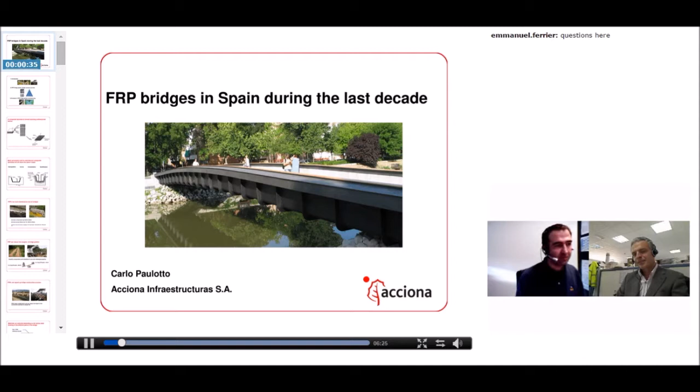Good afternoon, everybody. My name is Carlo Paulotto, as was told by Emmanuel, and I'm a civil engineer. In the last decade, my main interest was the application of FRP to civil engineering. This presentation will be focused on the experience gained by Acciona, a Spanish contractor, on the application of FRP to bridges in the last decade.

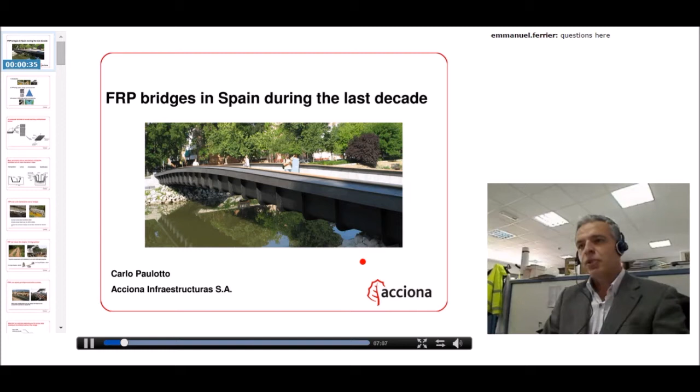My presentation is divided into three main blocks. The first block is an introduction devoted to explaining why we think FRP materials are good for bridge construction. The second block is devoted to presenting the design method we follow to design our FRP girder bridges. The third block is devoted to presenting the evolution of our manufacturing process. Finally, there are some slides devoted to the main conclusions that can be drawn from our experience.

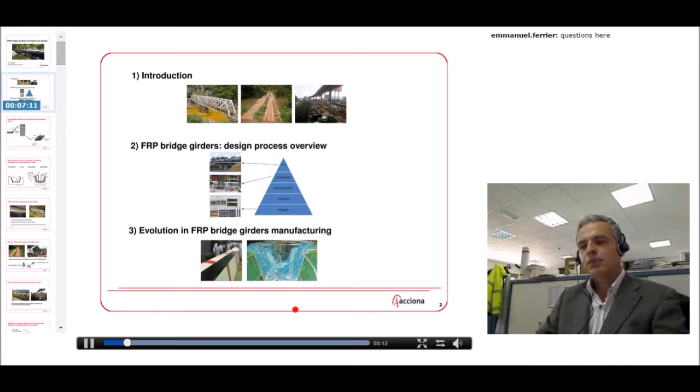Before moving to the first block, let me spend a couple of slides just to be sure that everybody is on the same page.

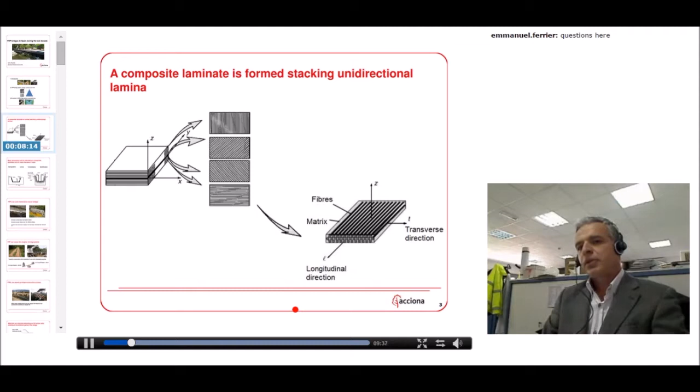If you imagine cutting out a piece of the wall of our FRP girder and looking at this little piece through a lens, what we realize is that the wall is formed by a set of laminae stacked one on top of the other. If you look at this element closer, you will realize that each lamina is formed by a series of aligned fibers embedded in a matrix, generally a polymeric matrix. You can realize that the mechanical behavior of this lamina is very different in the direction of the fiber than in the transversal direction. That is, the lamina is mechanically highly orthotropic.

There are many ways to manufacture FRP laminates, but all the processes share the same four steps. Impregnation, meaning the dry fabric is wetted by the resin. The layup step, in which the laminae are put one on top of the other with a predetermined orientation. The consolidation step, in which air trapped in the laminate is squeezed out. And the solidification step, in which the polymeric matrix gets solid.

Here I have put two examples of manufacturing processes. On the left you have a wet layup process. It's very simple: you put a layer of resin on a mold, generally a steel mold, then you put dry fabric on top of the resin, and with a roller you push the dry fabric against the resin layer to soften it. In this way you get the dry fabric wet and at the same time consolidate the laminate, then you can supply heat to cure the resin, and in this way the resin gets solid.

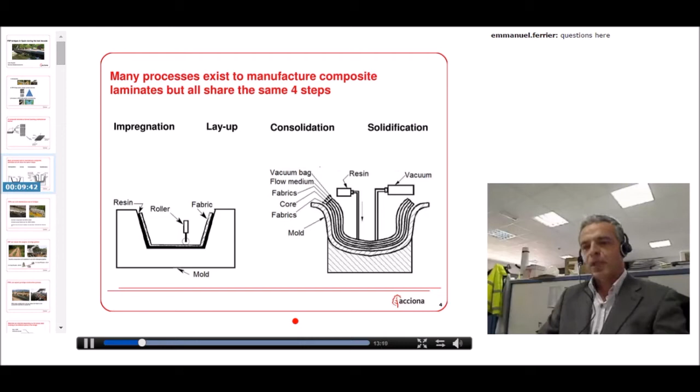After this short introduction, let's move to the first block of my presentation. It is devoted, as I mentioned, to why we think FRP materials are good for bridge construction.

The first reason we think FRP is good for bridge construction is that FRPs can curb maintenance costs of bridges. The maintenance cost of bridge stocks is very high. According to the Federal Highway Administration, the corrosion cost of highway bridges alone is around $8.3 billion a year, and indirect costs are 10 times this sum. So you realize this is a huge amount of money.

The main reason of this cost is steel corrosion. Since FRP do not suffer from galvanic corrosion, they offer a good chance to curb maintenance costs of bridge stocks. This is appealing not only for governments that presently are fighting to keep their budget under control,

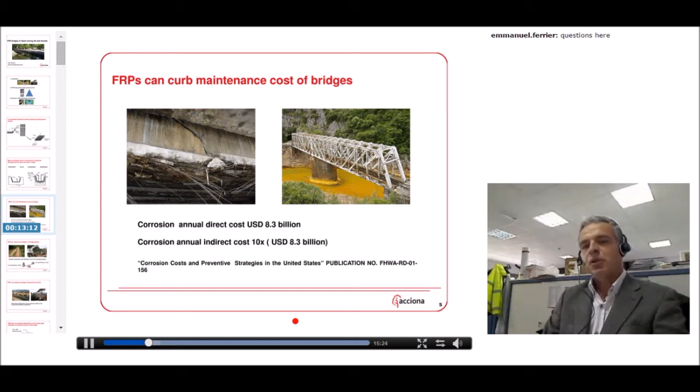but also for contractors, because nowadays large infrastructure contracts are often bid as design, construction and exploitation projects. This means that you not only design and construct the infrastructure, but you also have to exploit it - you have to maintain the structure for 20, 30 years before giving the infrastructure back to the government. So even for a private company nowadays, it's very interesting to be able to curb maintenance costs of infrastructure.

The second reason we think FRP are good for bridges is FRP can reduce the weight of bridge girders. Generally as a contractor, we don't always have our work site in urbanized areas. Sometimes our work sites are in areas with very challenging logistics, where communications are very difficult, and where you don't have very powerful tools. Here are two examples.

For example, the picture on the left is a bridge you encounter in central Gabon, where we operate. You can realize that you cannot cross this kind of bridge with very heavy materials. Often in this area, you don't have at your disposal a very powerful crane to install bridges, but often you use, for example, an excavator as a crane. So if we can have a very light structure, this simplifies transportation and installation in this area.

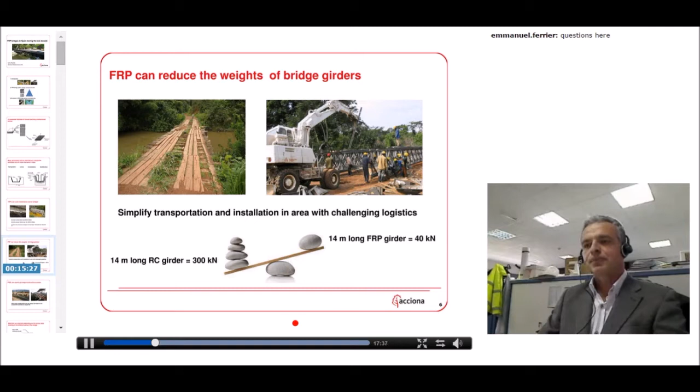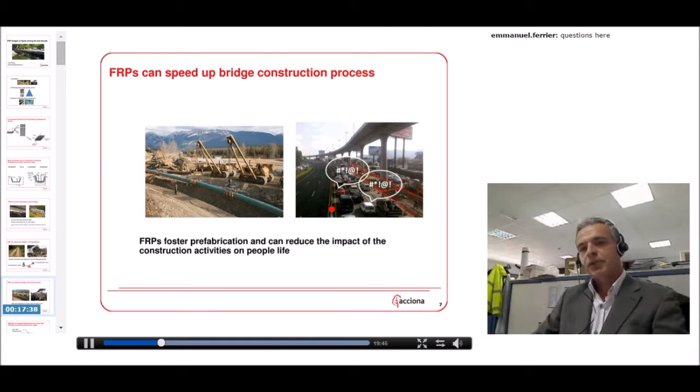Another thing you think when you're a student is that people will be grateful to you because you are building new infrastructure for them. But the sad reality is that people actually hate you because they see you as an obstacle between their house and their workplace. So if you're actually able to shorten the duration of the work site, you will really make them happy. Since FRP foster prefabrication, they are able to reduce the impact of construction activity on people's life. This is very important, especially for politicians.

Let's move to the second part of the presentation, devoted to presenting the way we normally design our FRP bridges. The first step is material selection. Generally, we select material depending on the stress state existing in the different parts of the bridge.

Here you can see a cross-section of one of our bridges. This is a cross-section at the abutment, because you see here the supports and the cross-section of the diaphragm at the supports. But you can see from this picture that in our case, the bottom flange laminate is mainly made of carbon fiber at 0 degrees, while the top flange laminate is mainly glass fiber at 0 degrees, and the web laminate is mainly manufactured using glass fiber at plus minus 45.

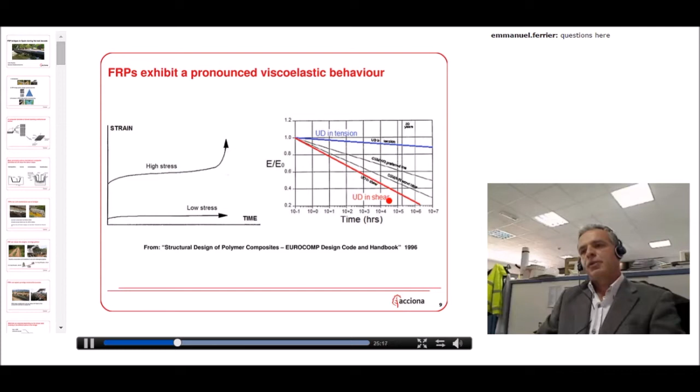Taking into account this difference in behavior between tension and shear, you can conservatively assume that the compression behavior follows the curve of shear behavior. This is why in this cross section we select reinforced concrete to resist compression forces.

We don't think it's a good idea to resist compression forces using laminates, so we prefer to resist compression forces using concrete, and use FRP to resist tensile stresses and shear stresses in this region.

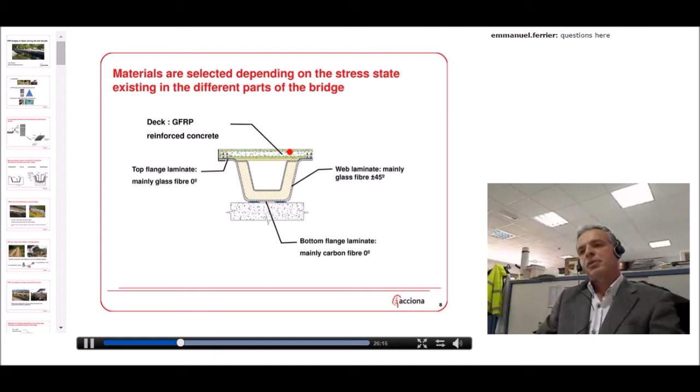Here you have a top flange of FRP that is mainly made of cheap glass fiber, and it will work only during the installation phase before casting the concrete deck on the bridge.

Once we have selected the manufacturing process and the basic material, that is resin and fiber, we go on with our design process, performing a reduced version of the pyramid test from the aerospace industry.

So what we do, once we have selected the matrix, the fiber, and the manufacturing process, is manufacture coupons, specimens, and test them. In this way, we characterize the mechanical behavior of the lamina.

Here you can see some samples that we tested for UD, I think it was a UD carbon fiber fabric. These are the specimens we tested in tension in the 0 direction, the specimen tested in tension in the 90 direction, this is the specimen tested in compression, this is the specimen tested in shear, and these are the specimens tested with the short beam tests.

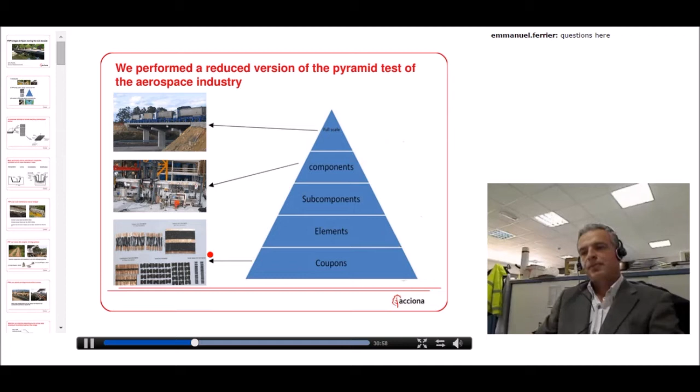As I told you, the following step, starting from the property of the lamina we evaluated experimentally, is to select a certain percentage and orientation of fiber. So we select the architecture of the laminates depending on the stress state that exists in different parts of the girder, and we evaluate the laminate property numerically.

We generally use a software called CADEC for this. It's a freeware that has been created and maintained by Professor Ever Barbero of West Virginia University.

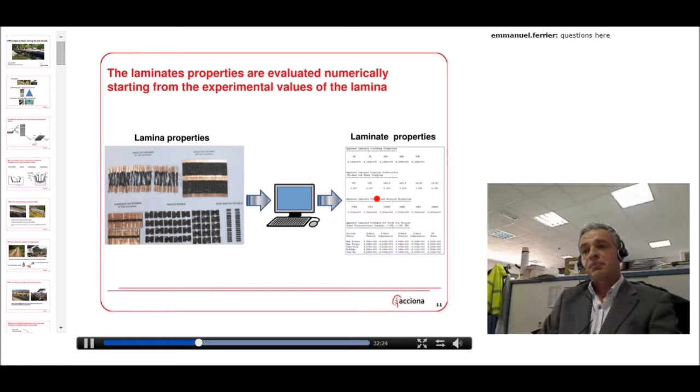With this laminate property, we perform the first check of the bridge by hand calculation using the Timoshenko beam theory. If everything is okay, we start simulating the bridge by implementing a finite element model. To do this, we generally use ANSYS software.

To simulate the laminate, we generally use layered elements like shell 99 and shell 93. These elements are layered, meaning they define the property of each lamina of the laminate. ANSYS automatically evaluates the stiffness matrix of the material, and you can apply failure criteria lamina by lamina automatically by asking the software to do this.

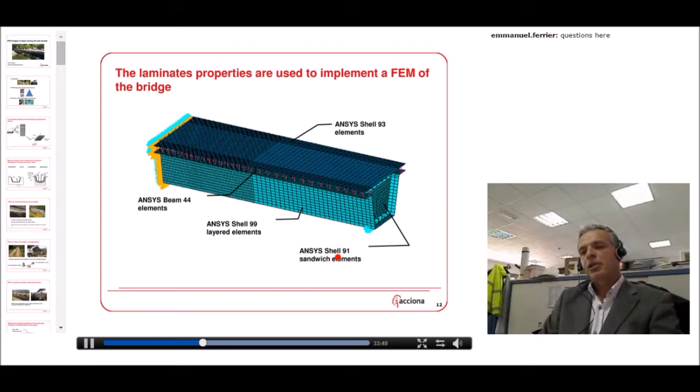To simulate a sandwich structure, we use the element shell 91, because for sandwich elements the classical lamination theory doesn't apply.

As I told you, each time we change the typology of the girder, we have performed a real scale test of the girder, and we have compared the experimental results with the finite element simulation results in order to assess if the finite element model is able to represent the actual behavior of the FRP girders.

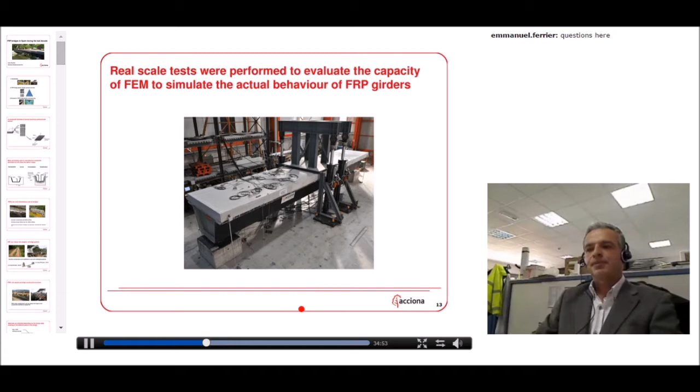This is a test of one of our girders performed at the European Laboratory for Structural Assessment in Ispra, Italy. In this case, the girder was submitted to 3 cycles up to the service load and 3 cycles up to the ultimate level load.

This is the displacement at midspan of the girder, measured by LVDT number 16, positioned at the center of the cross section at midspan. You can see that there is a good agreement between the numerical model and the actual behavior of the girder.

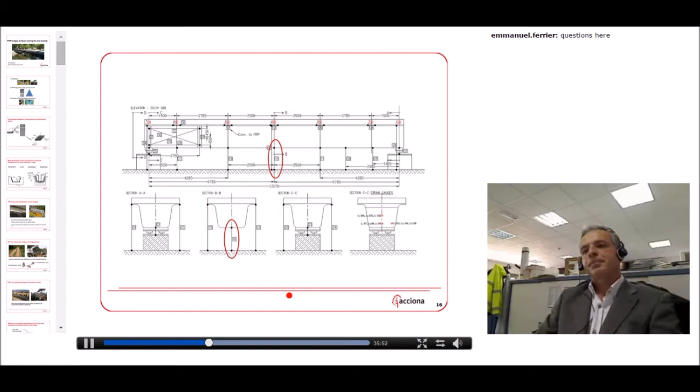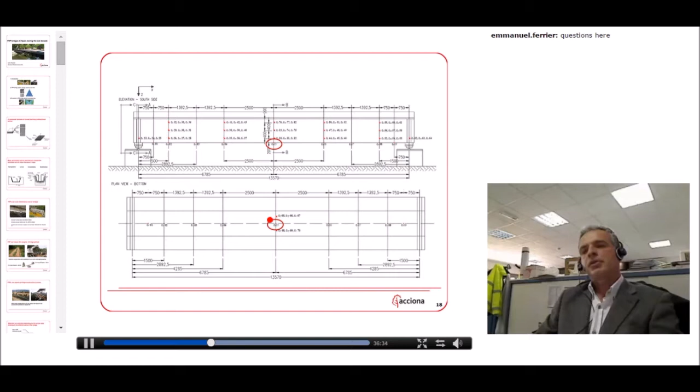We have checked that there is a good agreement in terms of displacement. Let's check if there is a good agreement in terms of longitudinal strain. So we applied a lot of strain gauges to the girder, including a rosette here, and we are looking at the strain gauges applied at the midspan, at the bottom of the girder, along its longitudinal axis. Once again, there is a good agreement between the numerical and experimental behavior of the girder.

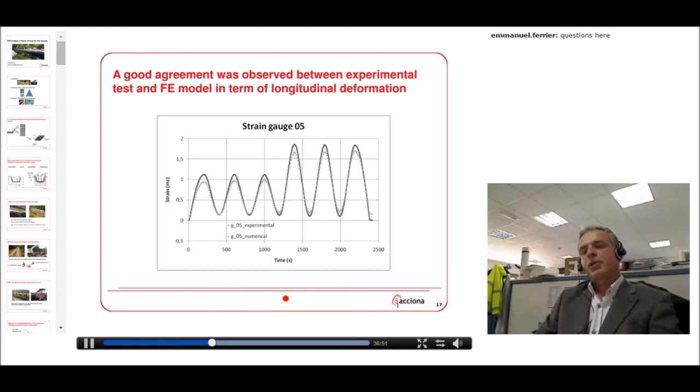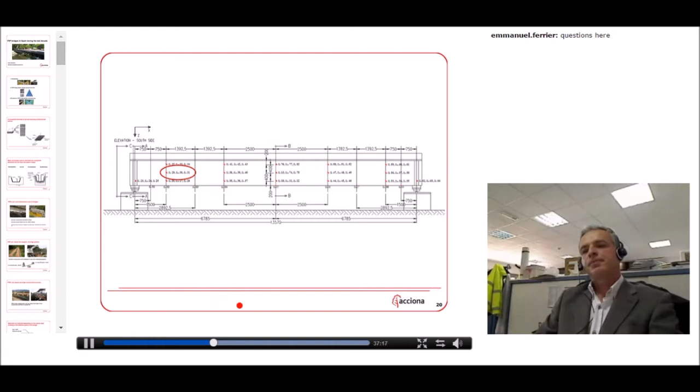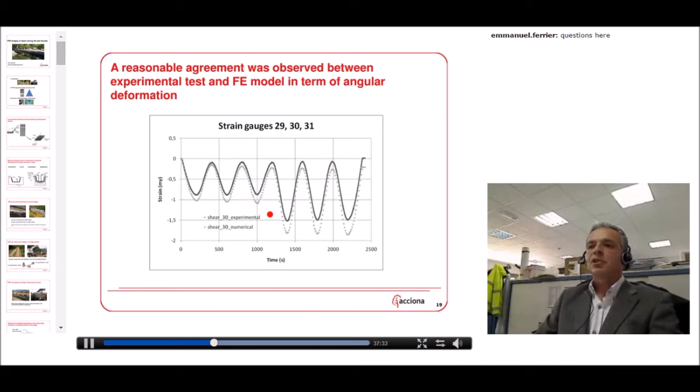After checking the strain in the longitudinal direction, we check if there is a good agreement in angular deformation. To do that, we check the rosette positioned here, close to one of the supports. And you see there is still a good agreement between the numerical and experimental behavior of the girder at the service limit state and at the ultimate limit state.

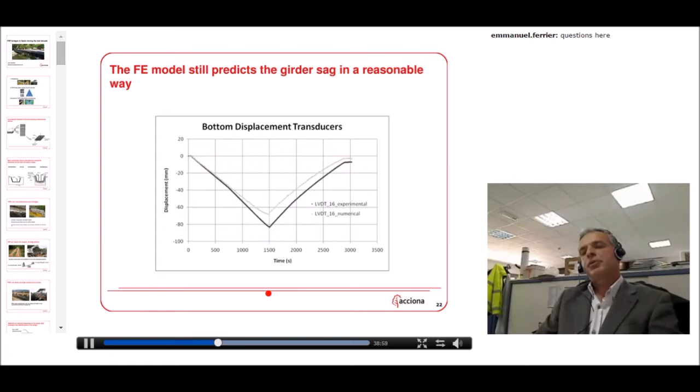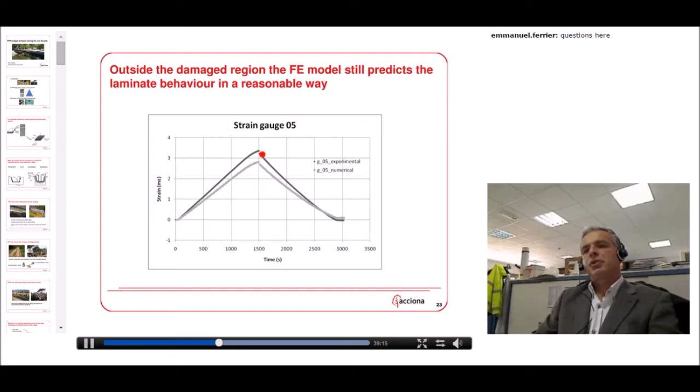There is still a reasonable good agreement, taking into account that at failure the girder is experiencing some inelastic behavior while the model is elastic. Even in this case, there is still good agreement between the physical and numerical results in terms of displacement. The strain gauge at midspan, at the bottom of the girder, also shows a good agreement between the numerical and experimental values.

But I need to say this is not a problem, because so far we design laminates for first ply failure. So actually we are not interested in capturing this very inelastic behavior of the girders. As I told you, the design is actually dominated by the service limit states, not by the ultimate limit states. You have enough reserve of resistance.

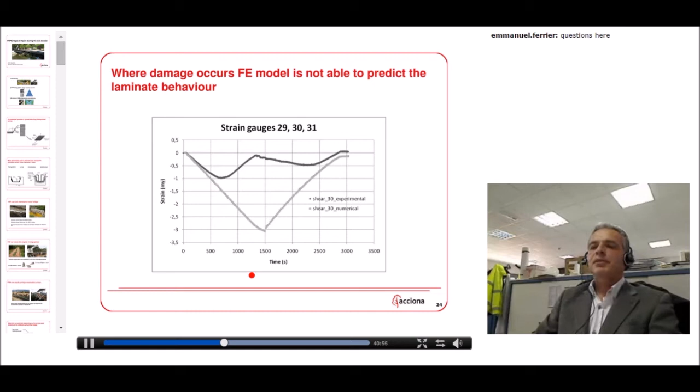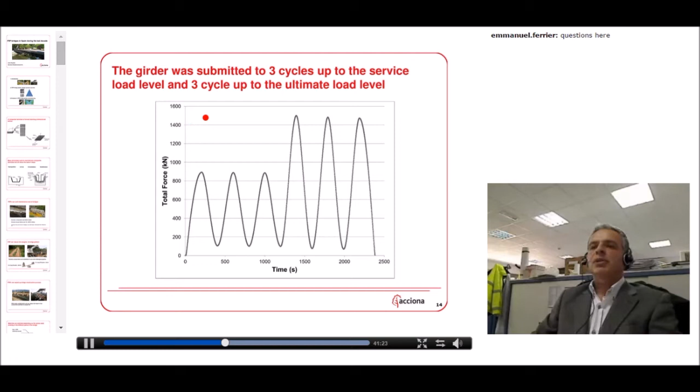If we go back here, you see that you actually have the failure of the laminate at a load level of 2,500 kilonewtons, while the load level at ultimate limit state that I showed you is around 1,500 kilonewtons. This is the ultimate limit state, and this is actually the load level where we observed the failure of the girder, so there is enough reserve strength.

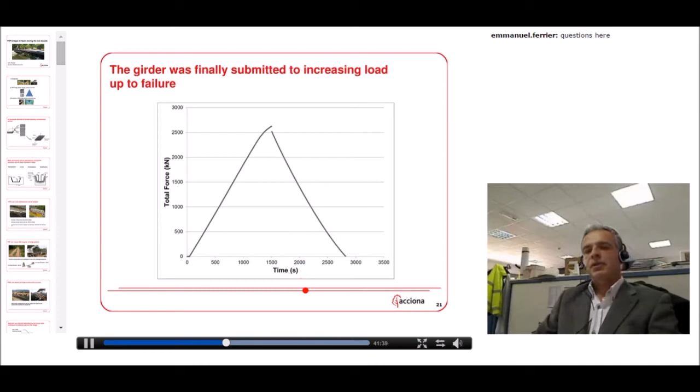Let's move to the third part of my presentation. In this part, I would like to illustrate how our manufacturing process has evolved over the last decade.

The first FRP girder bridge we built was in the north of Spain, in Asturias, in 2004. It was a continuous girder bridge on 3 intermediate supports, with spans of 10, 13, 13, and 10 meters, for a total length of 46 meters. We adopted a closed section girder with aerospace carbon fiber prepreg, and the laminates were consolidated by vacuum bagging.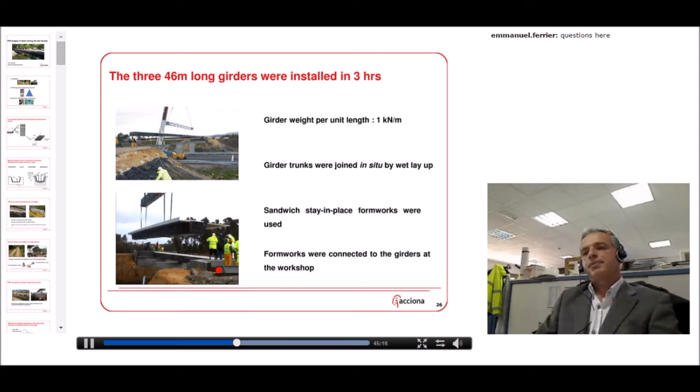Okay, the following bridge, actually there were 2 twin bridges we built in 2007 on the outskirts of Madrid. And we applied a set of modifications to our manufacturing process, taking into account the lessons learned during the first application.

As I told you, for the first application, we use a closed-section girder with trapezoidal cross-section. This is very good from a static point of view, but this obliges you to use a stay-in-place mold. The stay-in-place mold is represented here by this polyurethane mold. This means that for each of the girders, you lose the mold.

And this increases very much the costs of these girders. For this reason, when we start designing the second and the third bridge, we decided to go for an open section. And why an open section?

Because in this case, you can use a steel mold that can be reused for each of the girders. So you can use a couple of molds to manufacture all the girders. In this case, we use 2 molds to manufacture the 24 girders of these 2 bridges.

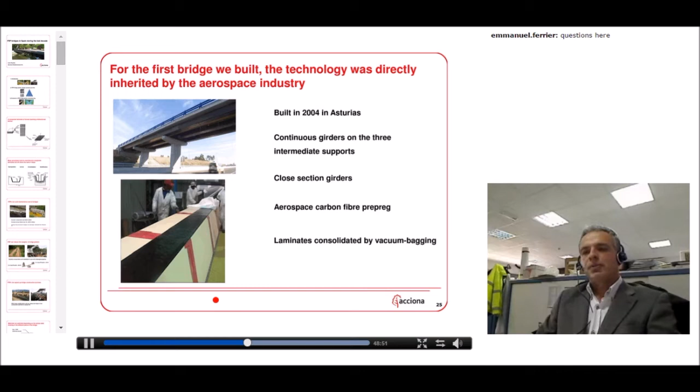So to try to reduce costs, what we did is produce our prepreg in-house. I mean, we took dry fabric, we bought a machine to impregnate the fabric, and we manufactured our own prepreg. You see here, people stacking prepreg fabric on the steel mold.

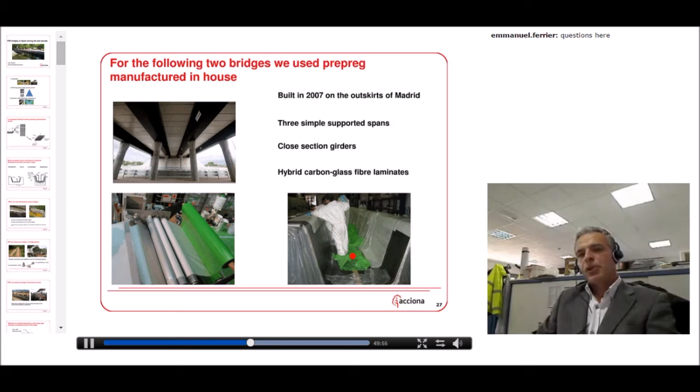Another modification: the previous bridge was completely made of carbon fiber. Carbon fiber is very expensive when compared to glass fiber. So for this new bridge, we decided to use carbon fiber on only specific parts of the bridge, not all the bridge in carbon fiber, because often it's not necessary. In this way, we were able to reduce very much the cost of the FRP girders.

Since we use glass and carbon and not a full carbon girder, you have to pay a little bit in terms of weight. You see, we pass from 1 kilonewton per meter to 3.5 kilonewton per meter. But even in this case, you can see that it was possible to install the girder using a simple truck crane.

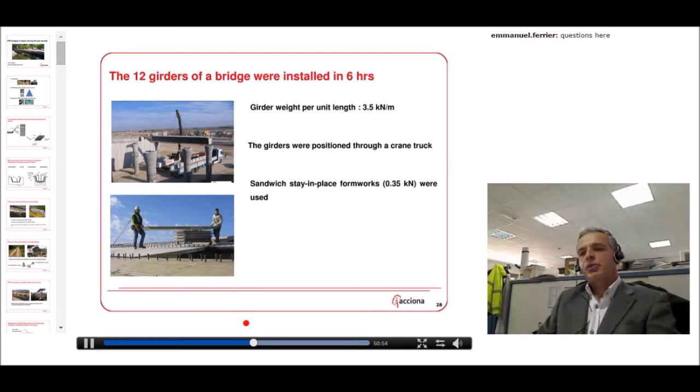In this case, we used stay-in-place formwork to speed up the construction process. These template formworks are essentially glass fiber polyurethane sandwich structures.

This is very interesting. Let's move to another example of an FRP bridge: a pedestrian bridge we built in 2010 here in Madrid. This example is very important to explain how important it is to have good communication between the architects and the structural engineer at the early stage of a project.

Generally, the architect is fascinated by FRPs for their capability to create innovative shapes and for the quality of surfaces. In this case, the architect was very interested in creating a contrast between the reinforced concrete and composite material surfaces. The example he gave us was that in his mind, this FRP pedestrian bridge should resemble EVE, from the Pixar cartoon, with a shining white appearance, while the ancient reinforced concrete pedestrian bridge positioned here could resemble Wall-E, this rusty robot. This was the main idea of the architect.

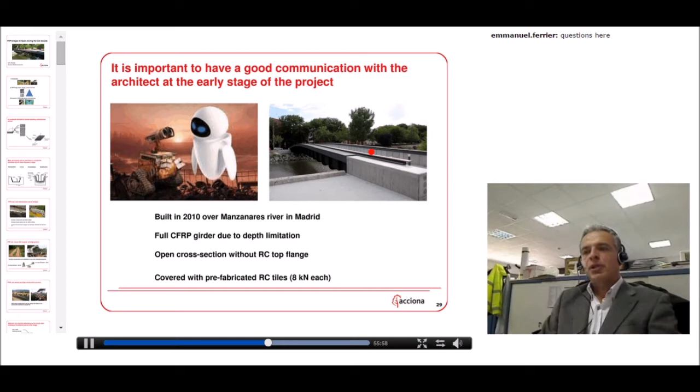We had a very tight schedule at the time we had to manufacture this pedestrian bridge, so to speed up the manufacturing process, we decided to change the manufacturing process, from wet layup to resin infusion.

You see here a step of the lamination process: people deploying carbon fiber dry fabric on the mold. Here is a picture of the girder just before injecting resin into the vacuum bag - you see the vacuum bag here. And here you see the thermocouple we applied to the structure to monitor the temperature during the manufacturing process, to track the increase in temperature due to the polymerization of the resin and the following curing process.

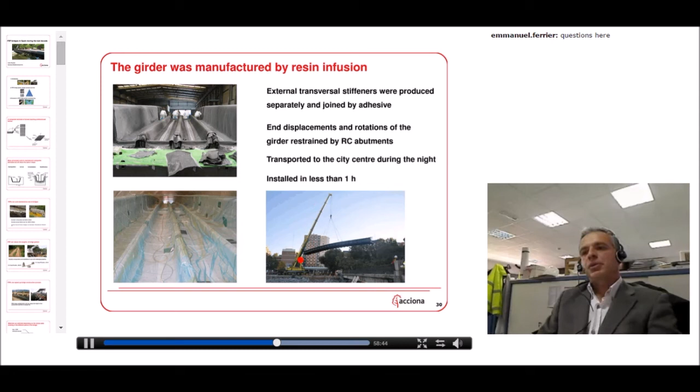The last bridge we built, in Gabon in 2014, in our opinion sums up all the best practices we have identified in the last decade. This is where the bridge would be located - you see here a stream, and the government wanted to exploit this stream to produce electricity. For this reason, they created a little hydro plant, and this bridge needed to cross this little dam.

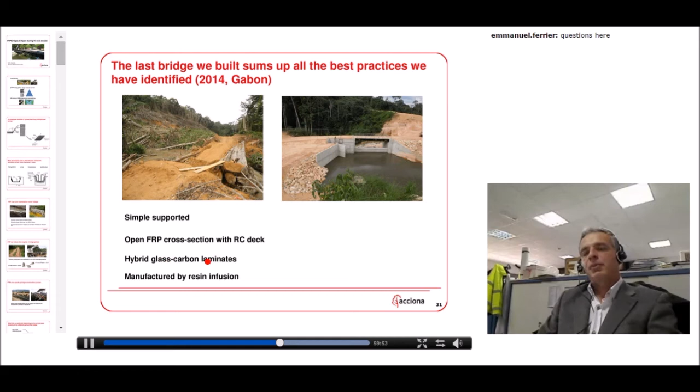For this bridge, we used a simple support solution, an open FRP cross-section with a reinforced concrete deck, hybrid glass carbon laminates, manufactured by resin infusion.

Here are some pictures representing steps of the manufacturing process of these girders. You see the dry fabric layered on the mold, the vacuum line here, and here what are called resin infusion consumables - this is a peel ply, and this is the resin infusion media, a sort of net used to distribute the resin from the injection point all over the dry fabric.

Here you see the vacuum bag and the injection point, just before the resin infusion starts. And here you see the curing process: the mold is covered by a blanket with a core made of rock wool, and all the volume under this blanket is heated by an electric heater to a predetermined temperature to cure the girder.

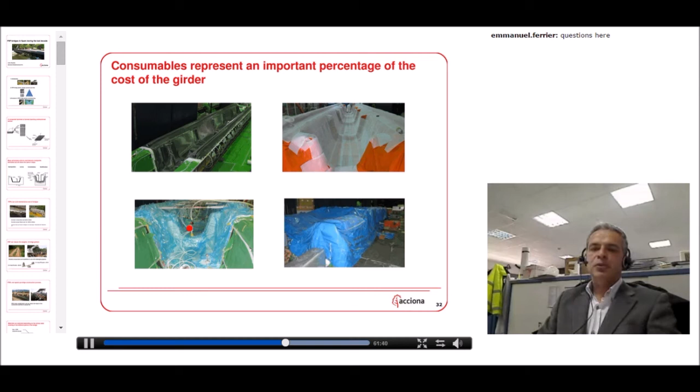You see some images of the installation. As I told you, this is, in our opinion, the best bridge so far we have produced. The bridge superstructure is steel free - we have FRP shear connectors, FRP reinforcement, and FRP stay-in-place formwork.

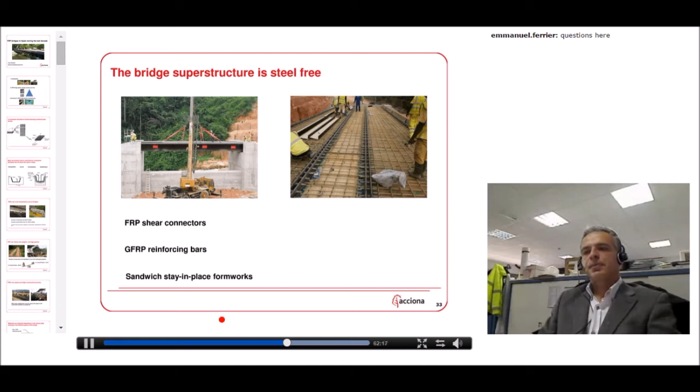I forgot to tell you the reason behind this demonstrator: cables represent an optimal way to use FRP, since they are mainly subjected to tension stresses. So this was a project where our main objective was to test the behavior of carbon fiber cables.

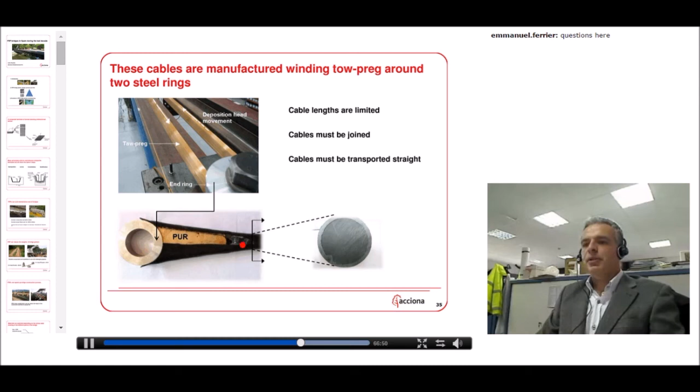In this case, we used 42-meter long cables for this footbridge. We performed some tests on these cables, because they are normally used for sailing boats, but for sailing boats with a much smaller diameter. Such big cables hadn't been tested before, so before using them, we decided to perform tests.

You see a tensile test, and the behavior of this cable is linear elastic until failure. This is the curve in terms of load and displacement, and this curve represents the load and the strain measured at mid-span of this cable. So the behavior is perfectly linear elastic.

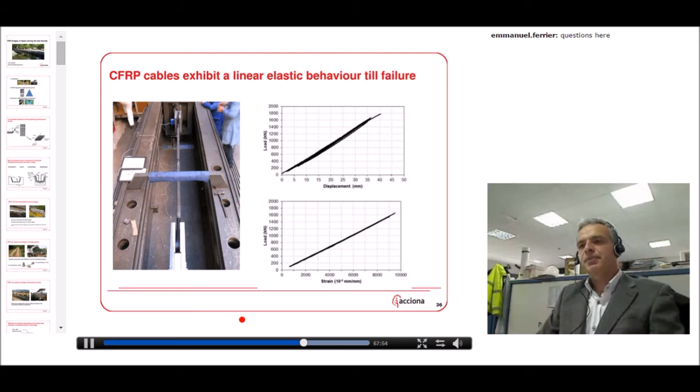The failure always happens at one end of the cable, generally in this region, where even if you model the cable using finite elements, you see the strain is very high. The conclusion of this test was that it's a good idea to use a cable, because this part works in tension, composite works in tension, and FRP performs very well in tension. But we forgot the problem at the termination, where the cable suffers because the fibers must go around the ring, giving them a curved configuration.

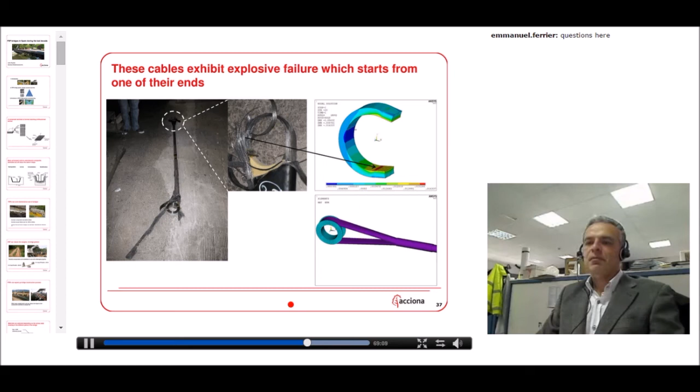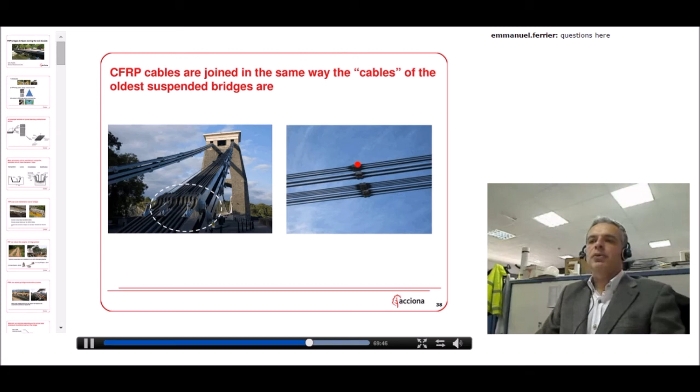As I told you, since these cables have a limited length, you are forced to join them. The solution we used to join the cables is the same one used centuries ago for the first suspended bridges in the UK, where you have a chain made of plates joined by bolts. In this case, you have cables, and here they are joined by bolts.

Conclusion: we think that FRP girder bridges can be feasible candidates as future bridges in the span between 20 and 50 meters, because, as I showed you during the presentation, they possess characteristics such as durability and rapid installation.

Often I see people try to apply FRP bridges for very long span bridges. From an economic point of view of a contractor, this is not very interesting, because a large part of the bridge stock around the world has a span between 20 and 50 meters. So it's very interesting to apply FRP to this range of span. Bridges with very long spans, over 1 kilometer for example, are very rare, so from the point of view of a contractor, it's actually not very interesting. Based on our experience, the best solution for this kind of bridge is summed up here.

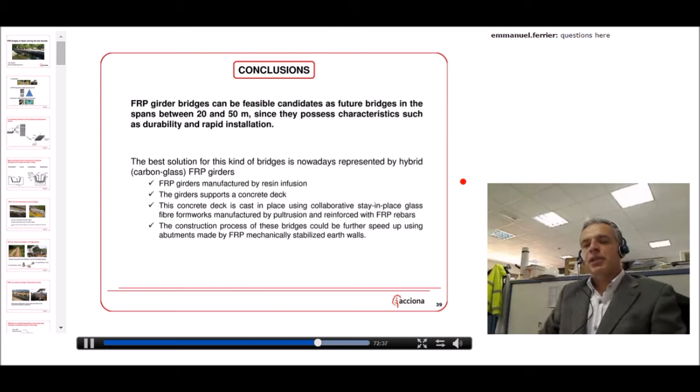Another thing to test is the possibility to further speed up the construction process using abutments made by FRP mechanically stabilized earth walls. We have tested FRP mechanically stabilized earth walls here in Spain, in one of our sites, but so far we haven't tried them in a real project environment.

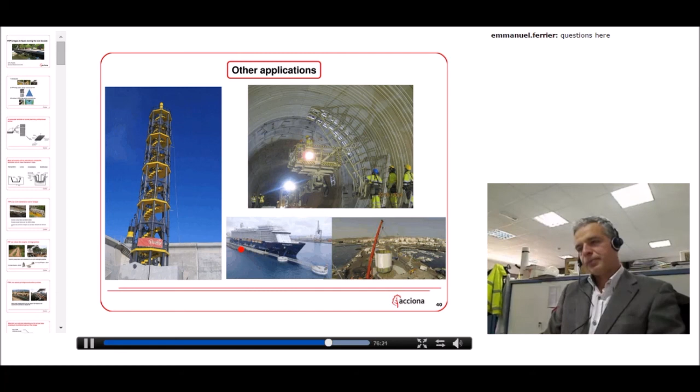Yes, there is a question here from Azadeh: can you comment on the environmental durability of glass used for bridges? And furthermore, glass is not good under fatigue load in bridges.

Regarding durability of glass used for bridges, I think glass fiber is a good solution. If you look at desalination plants and chemical plants, glass fiber is massively used because it's the only material at a reasonable cost able to resist the harsh environments found in desalination and chemical plants. Regarding UV protection, you do need to apply UV protection to your glass fiber element, but this is not a very complicated issue for glass fiber.

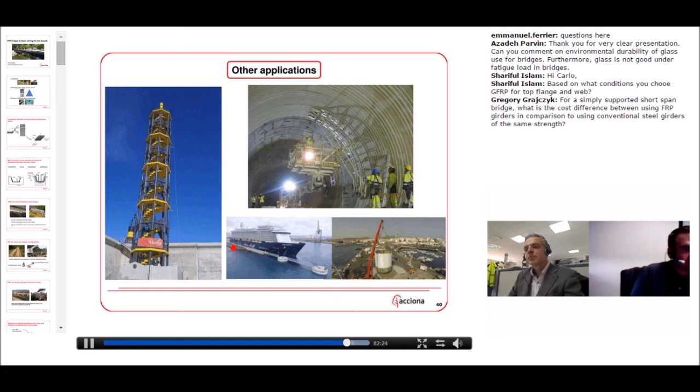And the question I have is related to that cable bridge. How did you guys address that type of explosive failure of the cables, and how is it to do the maintenance and verify if, for example, the strain or the stress on the cables are still in an acceptable range, because this is the main support of the concrete deck of that bridge, right?

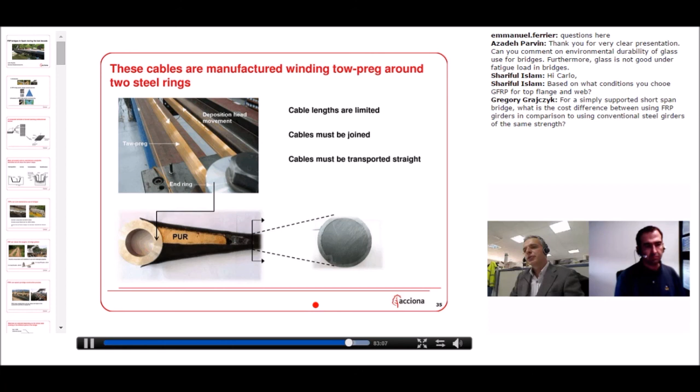Yes, the main support are these cables. You see, the failure is actually explosive. And what we did, during the installation, we installed strain gauges on, if I remember, 8 of the cables, and we checked the evolution of the strain of the cables during the installation process and in service.

This is how we manage and use these cables. And one of the concerns was mainly the creep of the cables, but so far we haven't observed so much creep in this cable.

Okay, thanks again for the response. Thanks. And maybe the last comment or question coming from Gregory, it's a complex question about the price. Since it is a prototype, yeah.

I think... No, I can tell you the cost is actually a problem. It depends on the country. Depends very much on the country. In Spain, so far, for example, you cannot compete with concrete in short spans unless you have very complicated logistics. Sometimes, if the logistics are very complicated, the cost of saving on very powerful cranes is compensated by the higher cost of materials. But in short spans, generally there is no competition with concrete.